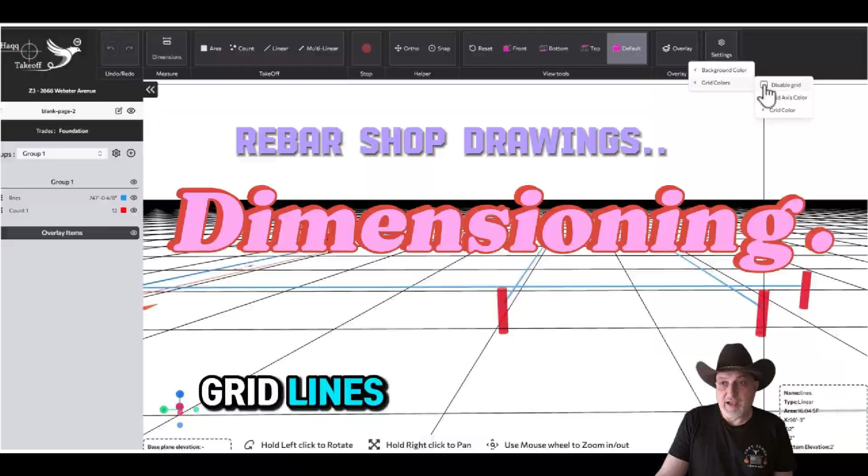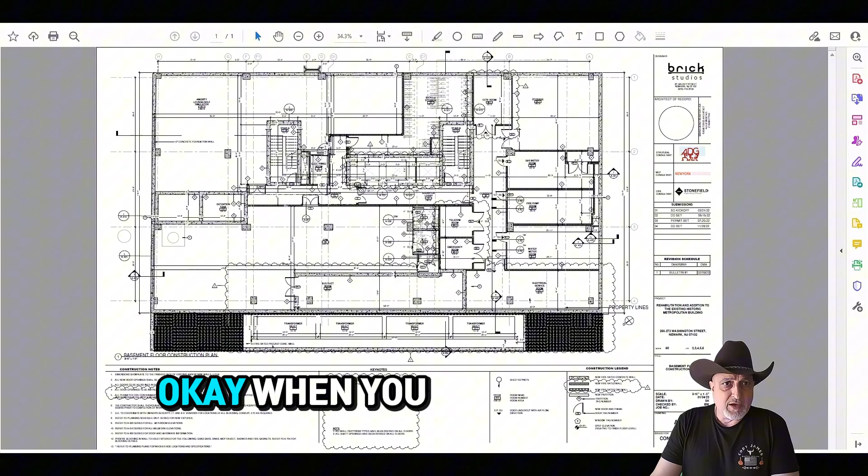In this video, I'm going to show you how proper dimensioning in rebar shop drawings has to be done. Right now, what you see is pretty much a rectangle building, but we don't see any dimensions for it. When you look at the architectural plans, they give you dimensions between the column lines, and we need to show these dimensions in our shop drawings. Plus, we need more. These are not enough.

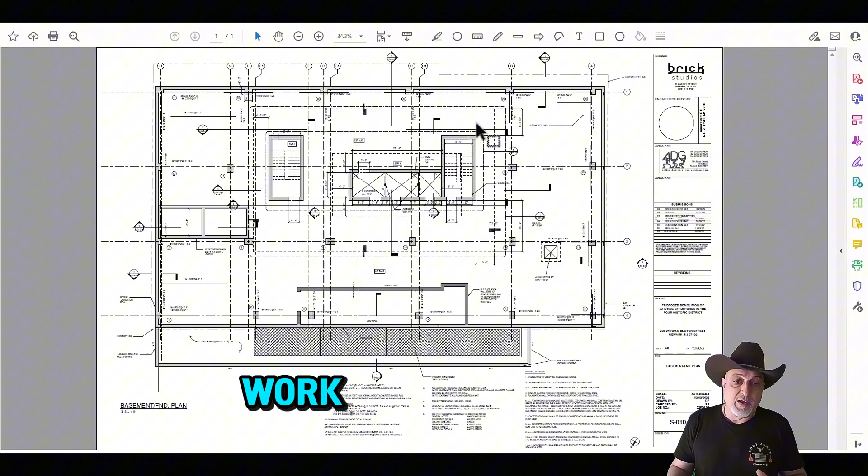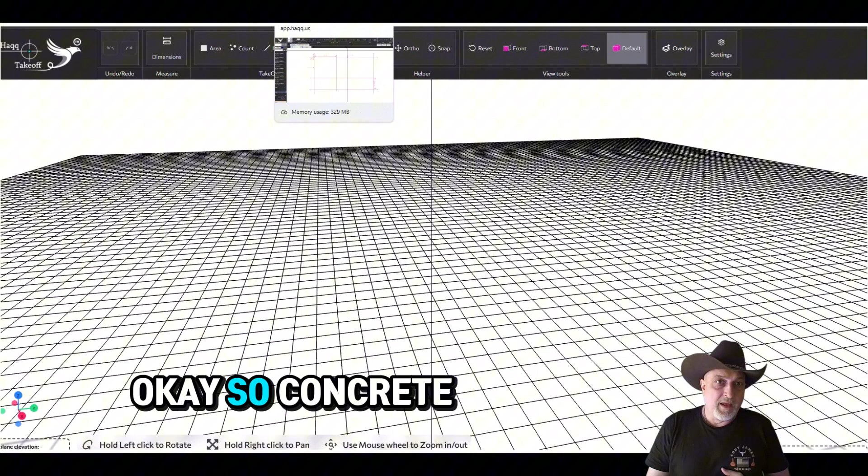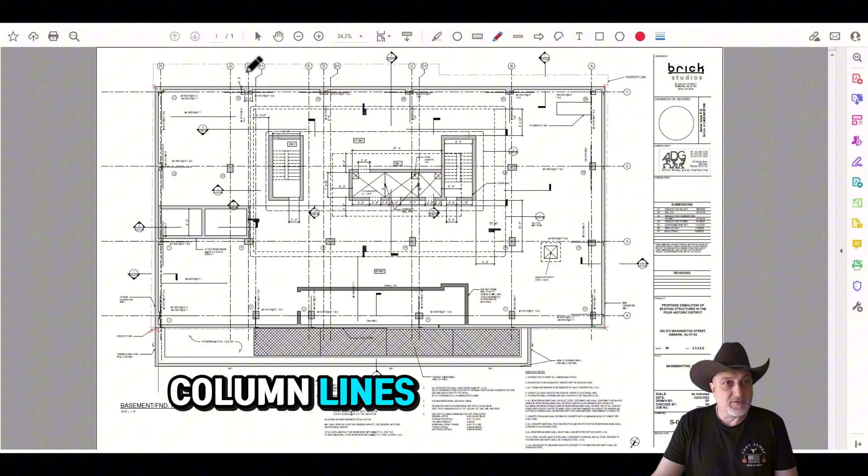Why? First, you need to understand how surveying works. When the concrete contractor goes to the site, there's pretty much nothing out there. This is what your site looks like: just some dirt. So the concrete guy goes to the GC and tells him, I need the corner points of the building. Give me the 4 corners of the building, this corner, this corner, this corner, and this corner, and some dimensions from these corner lines offset to the column lines. For example, column F and column line 3.

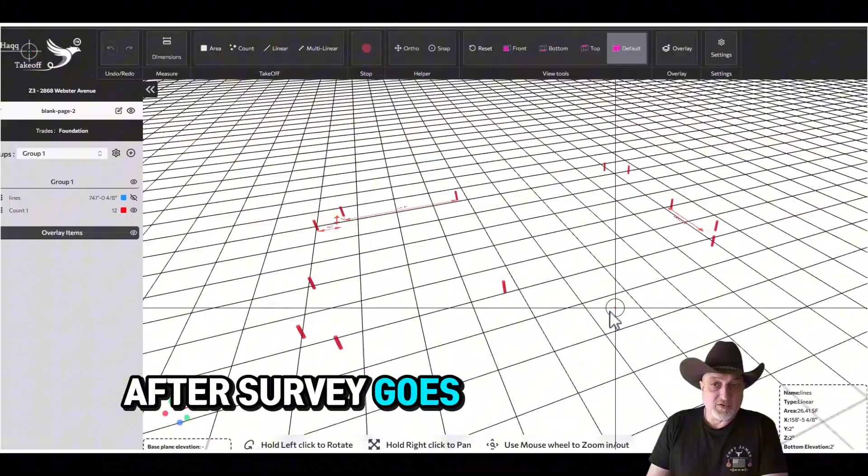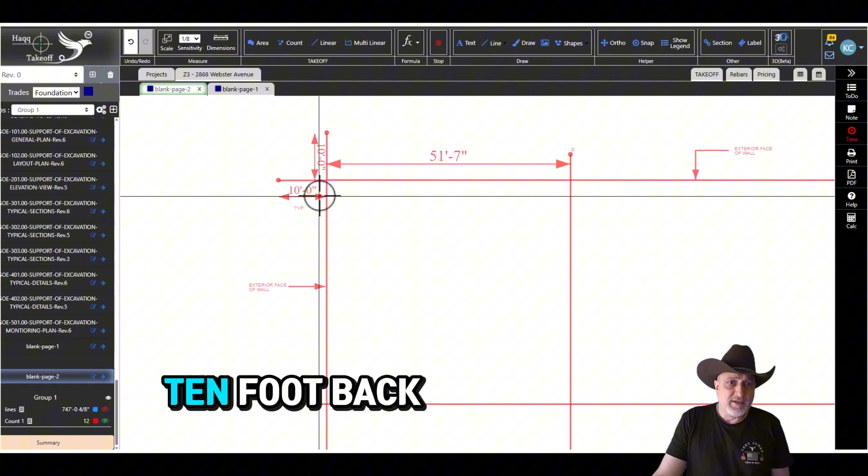The surveyor goes to the site and gives you these offset points. After the surveyor goes to the site, he puts some stakes on the ground and provides this drawing. He tells you, I put these stakes on the ground, and this stake is 10 foot back from the exterior face of the concrete wall, the same way in this direction, and the same way across the line. For all 4 corners he provides stakes. So these line up, and we get a straight line.

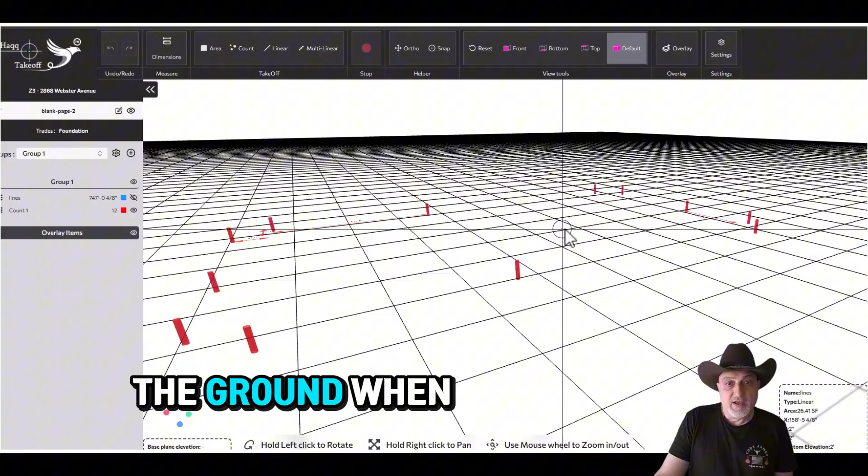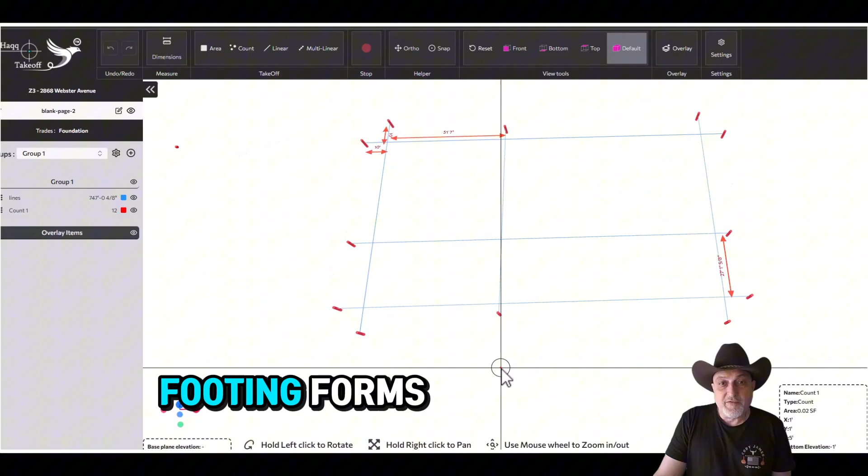When the concrete guy goes to the site, he sees these stakes on the ground, and he puts up some string lines, like ropes. Let me get rid of this grid system. So he puts some ropes on the ground to set his footing forms. But when he's putting his footing forms, he still works from the surveyor's exterior face of the walls. He doesn't have the exterior face of the footings. He has to work from the walls. So wall dimensions are critical.

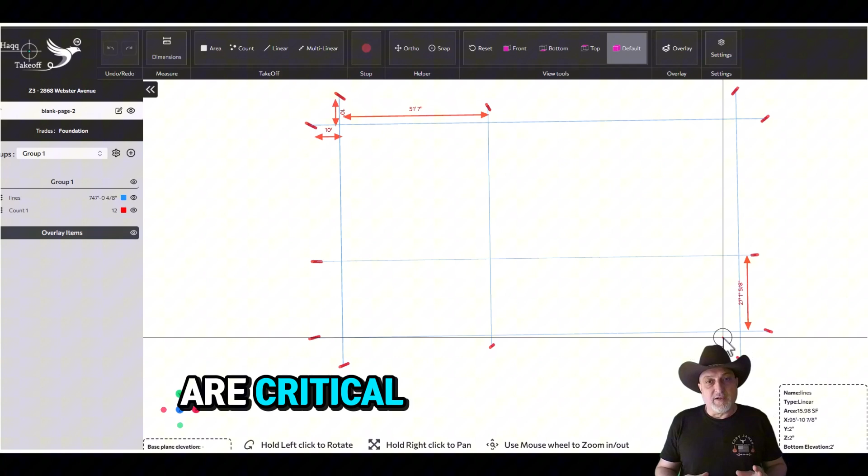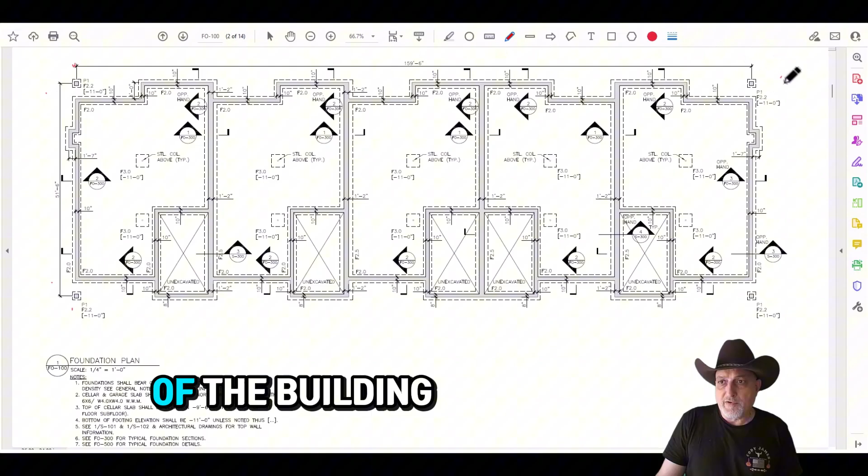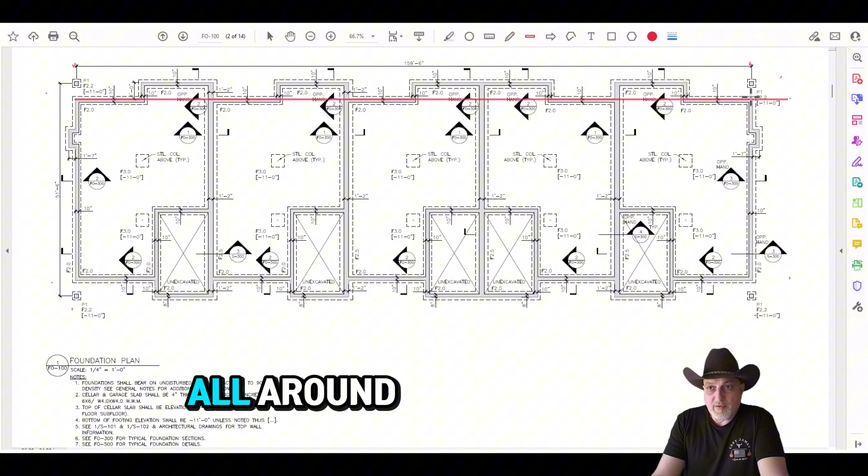Now let's go to this drawing, for example. This one has a lot of ins and outs. Let's say the surveyor gives him a couple of points at the corners of the building, 10 foot off this corner this way and 10 foot this way, same thing for 4 corners of the building. Then the concrete guy lines up with the face of the wall. He puts a string line from one to another all around, and he uses those stakes the surveyor provided.

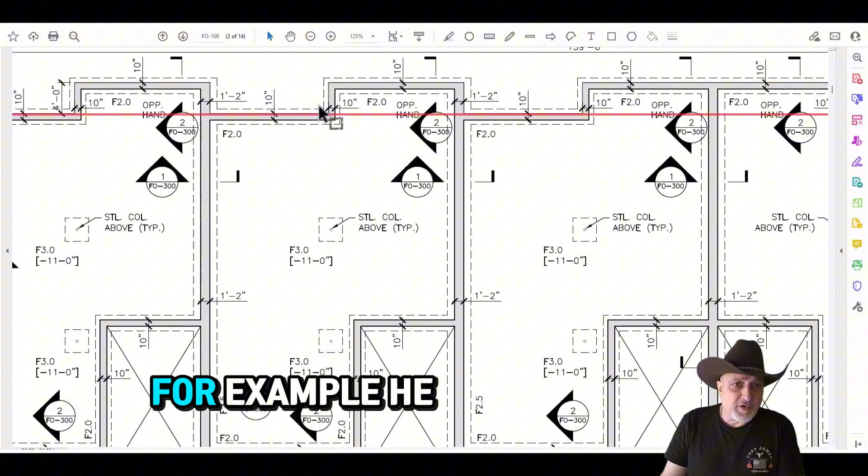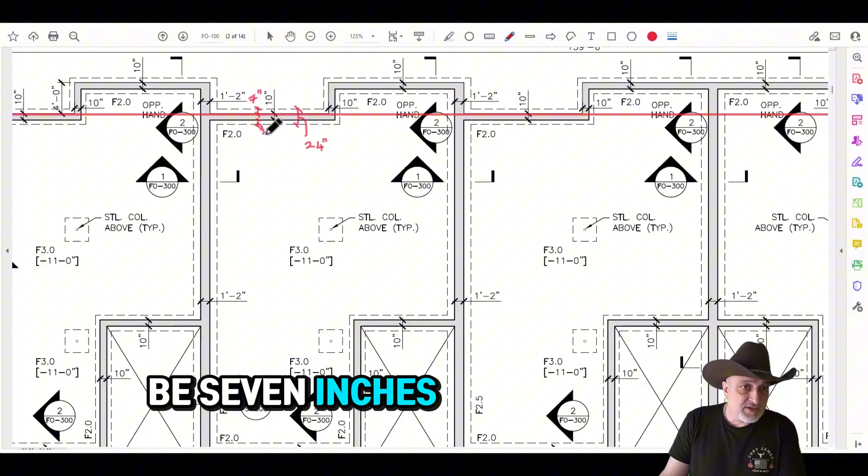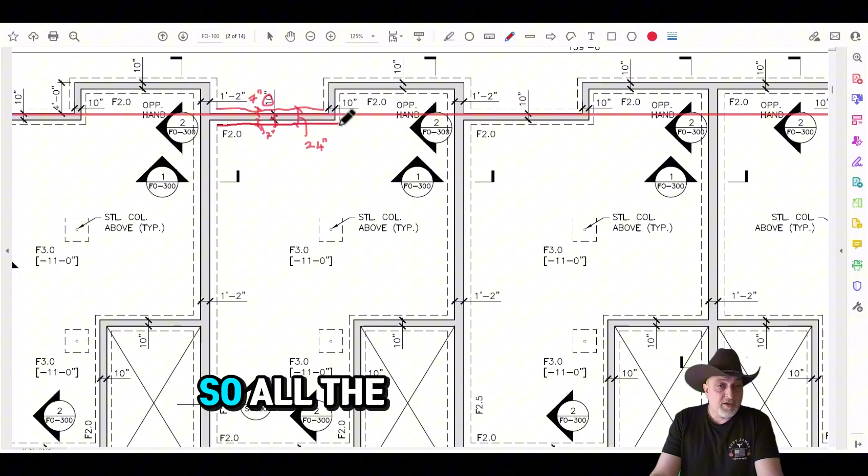When he puts up his string lines, he pulls off dimensions from this string line to set his formwork for the footings. For example, if this is a 2 foot footing, 24 inches, he goes 7 inches on this side. So he pulls off 7 inches from the exterior face of the wall to set his form for the footing. And he takes 17 inches, because the wall is 10 inches, 10 plus 7, 17 inches here to set this form. So all the dimensions work from the exterior face of the wall.

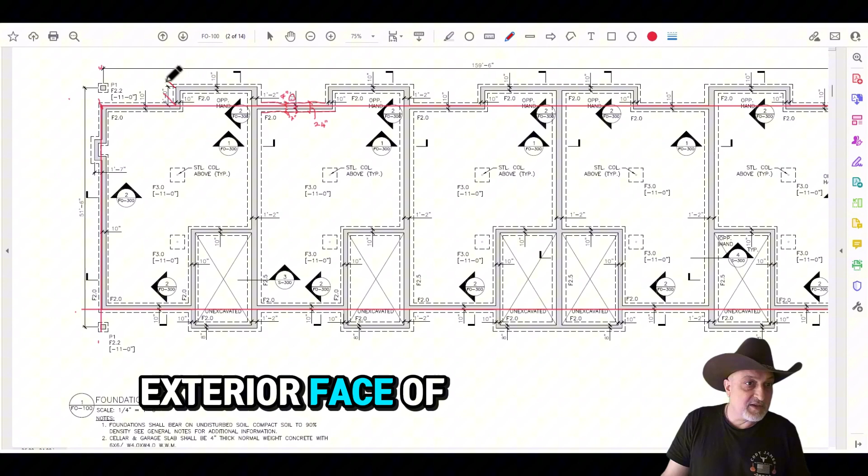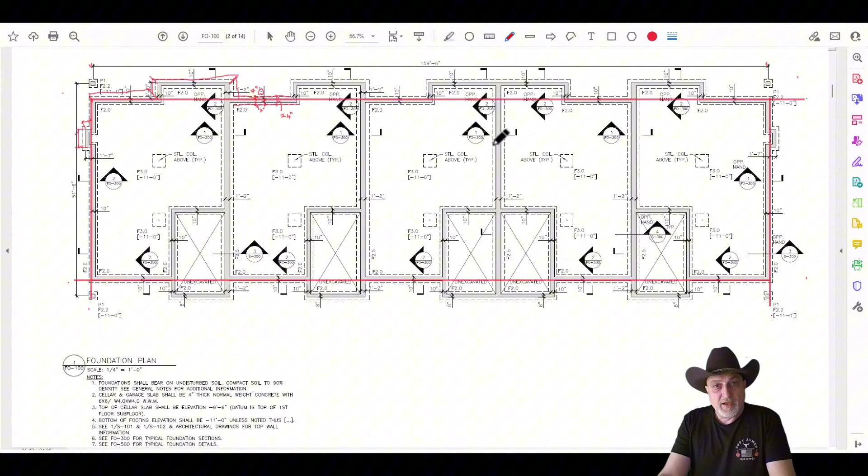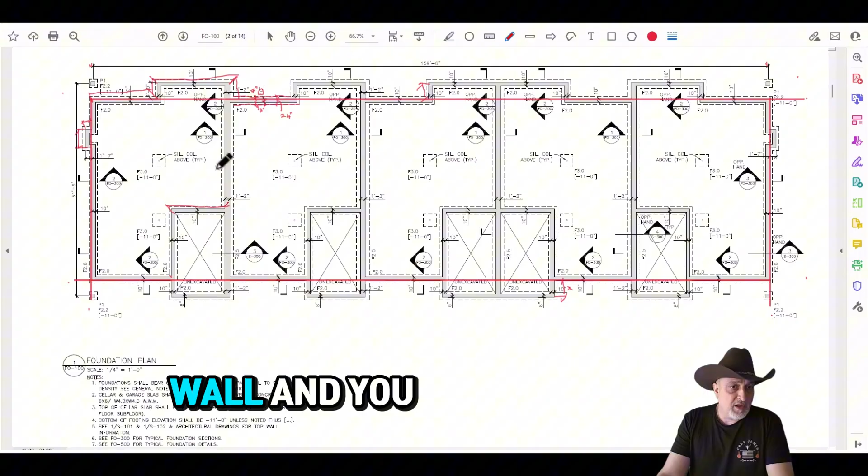Now you know this. So what dimensions do we have to give them? We have to give them corner to corner dimensions, exterior face of the walls, corner to corner. We have to provide these dimensions all around the building. If these dimensions are the same, you can just provide one. That will be enough for all of them. If it's a different dimension, then you have to provide all of them. For interior walls, you have to provide dimensions wall to wall. And you have to provide wall thicknesses.

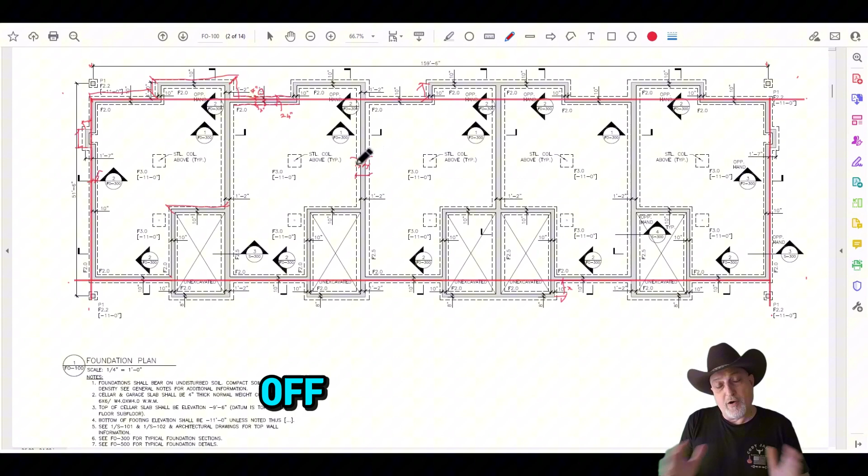And then the width of the footings, and what's the offset for the footing edges. Sometimes the footing will be off. This is critical because on the footings especially, setting dowels is very critical. If they set the dowels in the wrong place, they have to chop them out and drill them back in, and they may have to remove the footing too. Then it will be very costly.

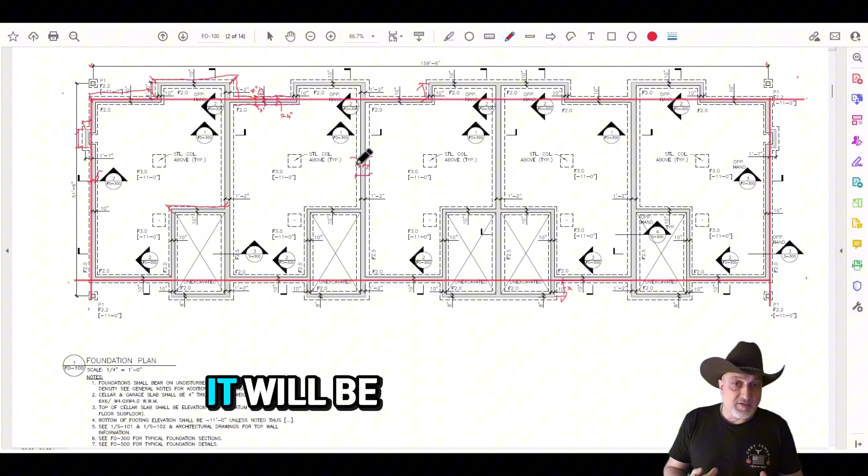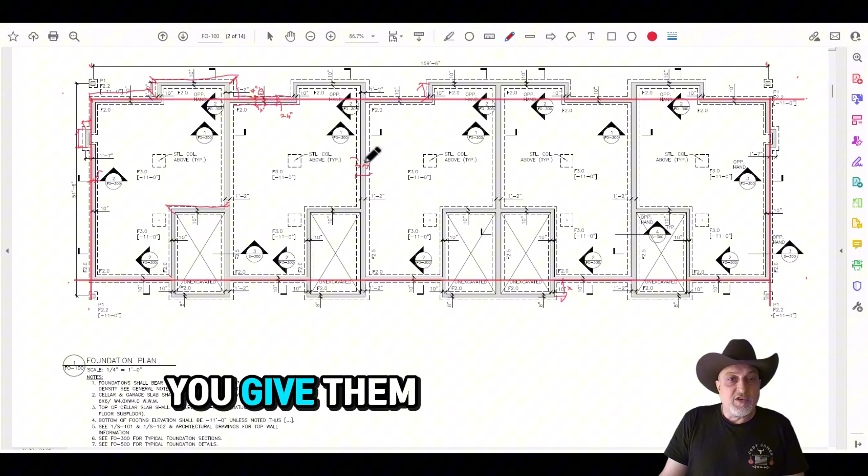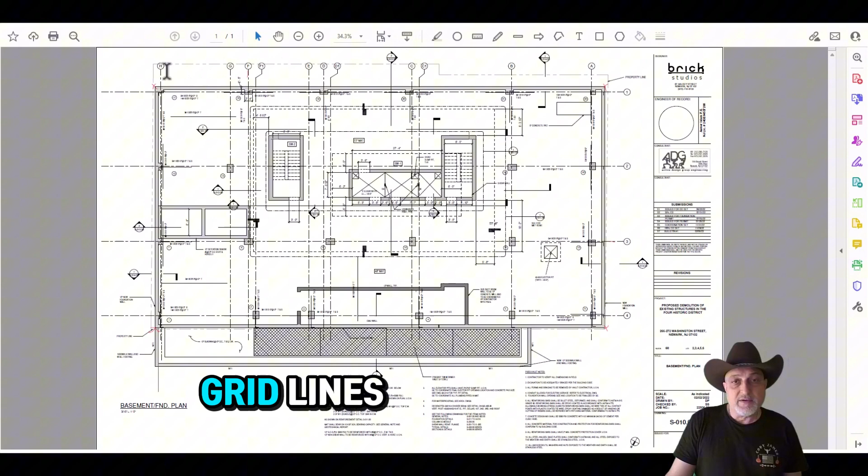So even in the footing shop drawings for the wall footings, you need to provide dimensions for the walls. Don't give dimensions for the footings. That's worthless. You always give dimensions for the walls, and they take it from there. When you give them these offset dimensions, that's all they need. They can figure out the rest. So we have to provide exterior wall corner to corner dimensions. We also have to provide dimensions for the column lines, grid lines, dimensions between column lines. All of these dimensions you have to provide.

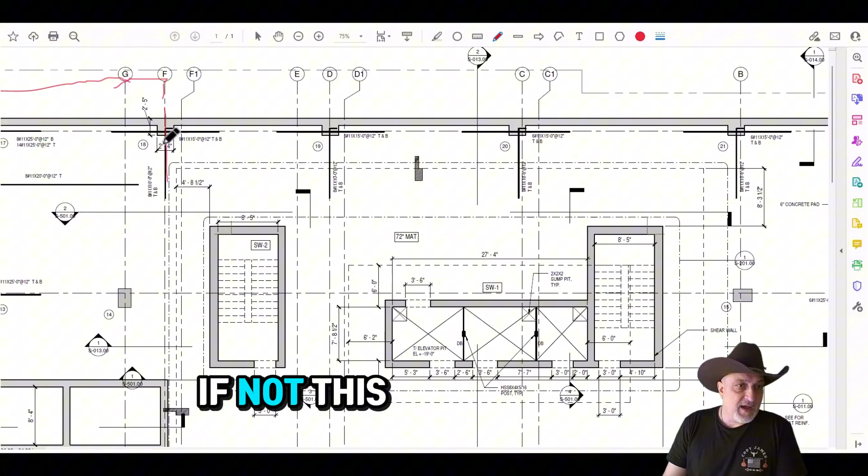Not only that, most of the time columns are at the center of the grid lines, like this one, but sometimes not. If they are, this is good enough.

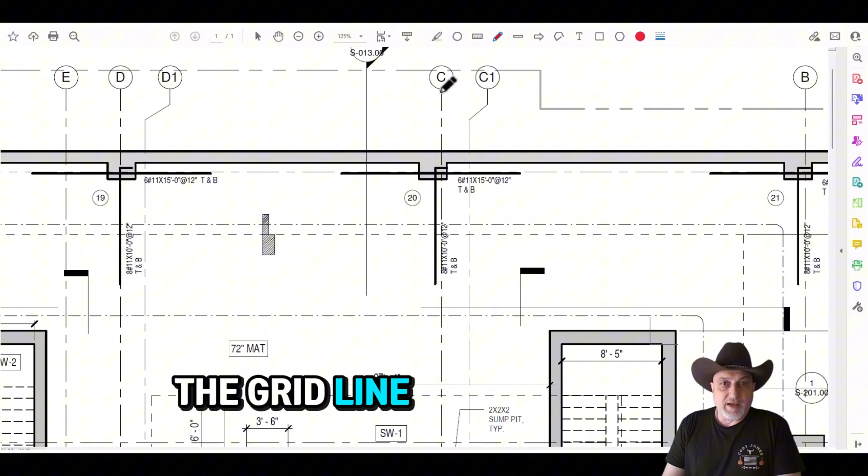Okay, this is perfect. Or you can just give him this dimension, that will be okay too. You can give him this dimension, we'll take this as well. But sometimes columns are offset. Let's say this column, for example, is not at the center of the grid line. So what you'll do is give him the dimension from either side, either this side or that side. You give him one dimension and another dimension from here or here.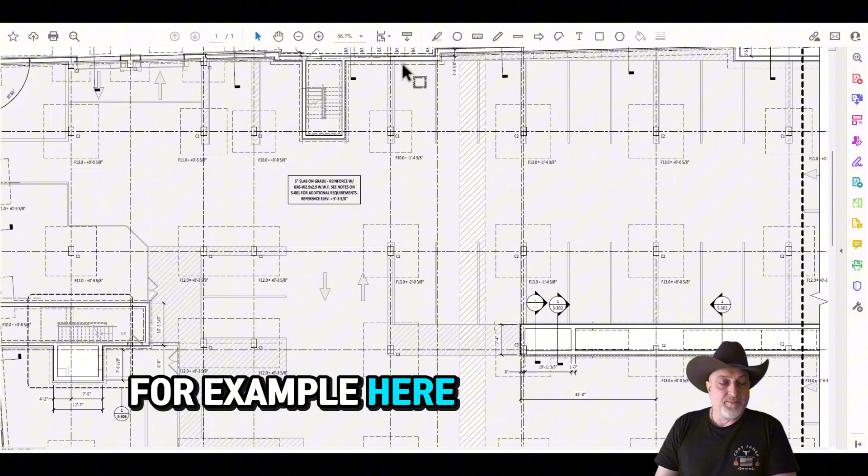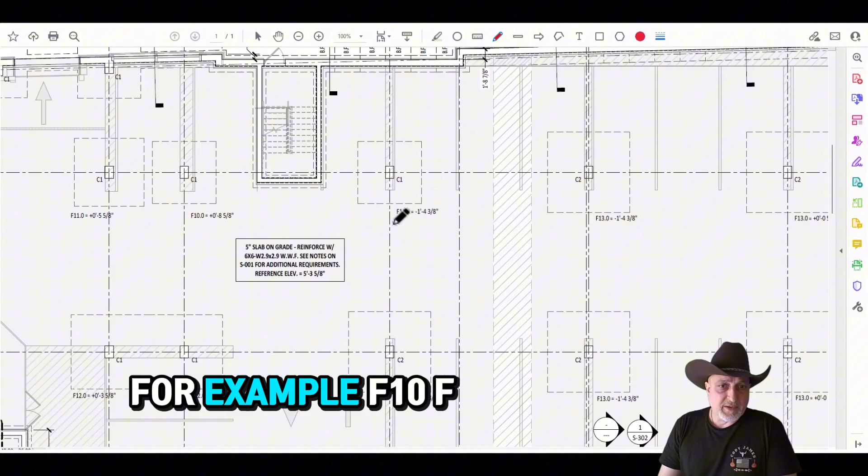Okay, and let's take a look at the column footings, for example, here. On this drawing, I believe everything is at the center of the column lines. If you just provide these column line to column line grid dimensions, that will be enough to locate these column footings and columns. And give some dimensions, for example, for the F10 footing. Okay, we can guess this is a 10 by 10 footing, but just give one dimension for each type of footing. It doesn't really hurt much.

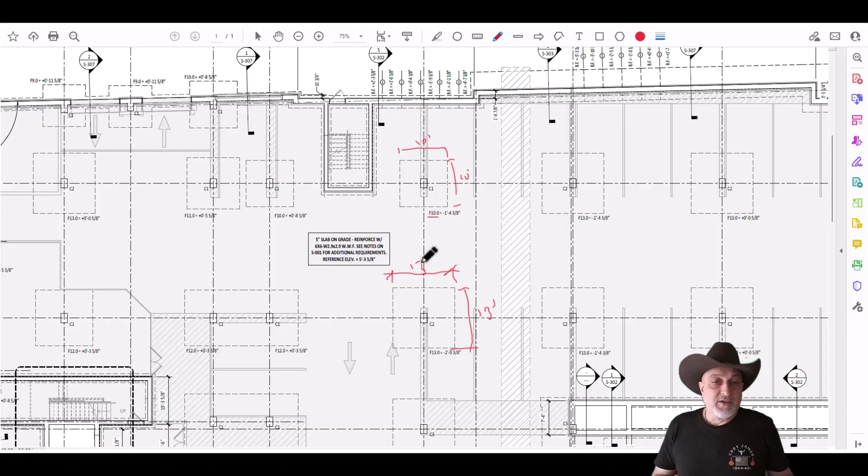And you've got F13, so many F13s here, just give one dimension for one of them. F13, 13 feet here, 13 feet here. So the guy in the field knows to make sure F13 is 13 feet long. Sometimes the engineer may use something else. For F13, he can use some other dimension. He doesn't have to use 13 feet.

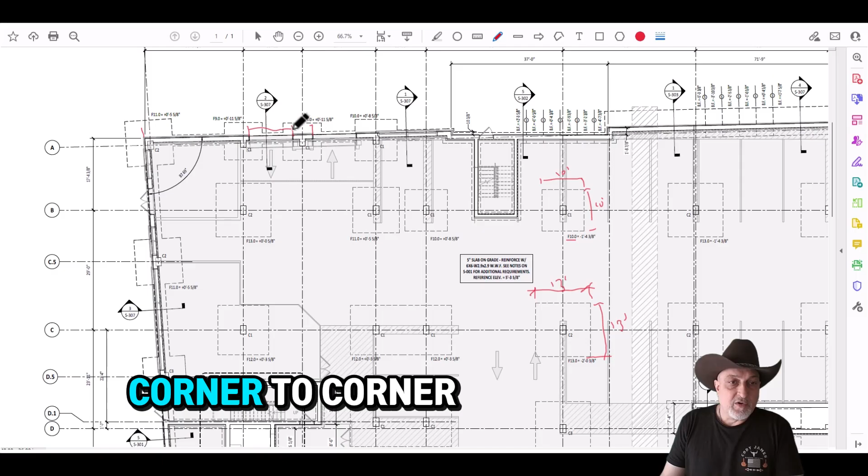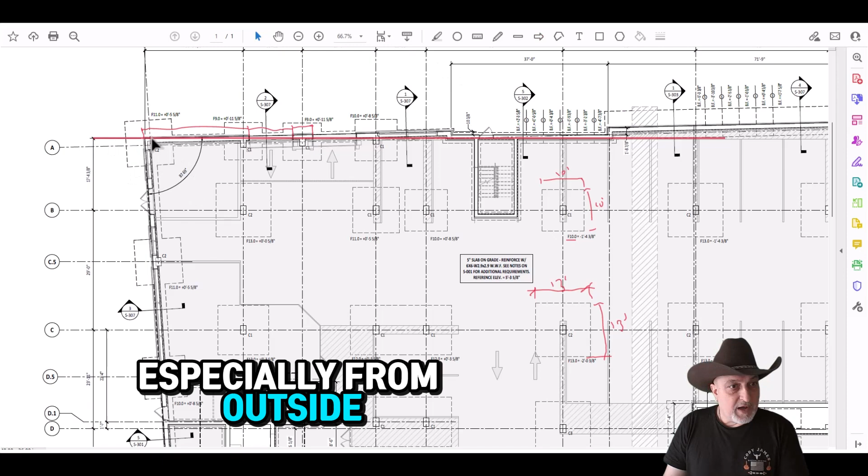And for the walls, we said exterior corner to corner dimensions. For the openings, yes, you have to provide dimensions corner to corner. These are very useful at the site. If there's an angle, give them the angle from here. That's the straight line. Let's get a straight line here. Give them the angle from the straight line, especially from the outside of the corner. What is it? 3 degrees, 2 degrees, whatever it is. This angle is not going to be useful for them.

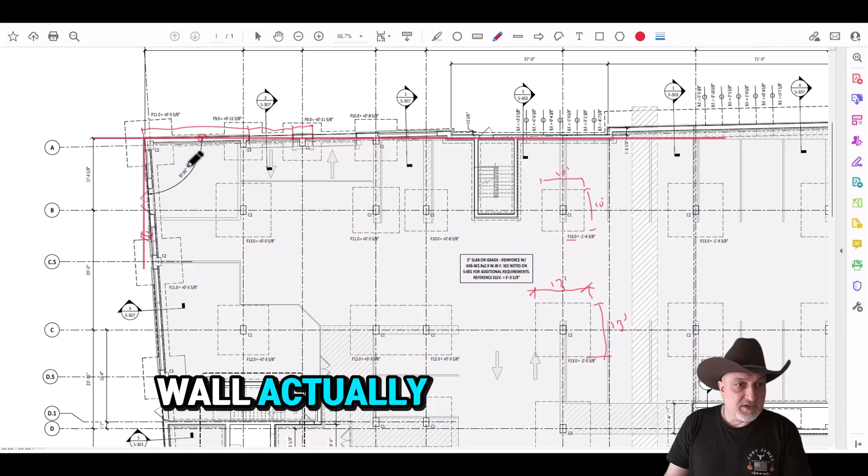And you can give another angle here. This angle maybe. After setting this wall, actually this may work. You can pull from the other wall. But before setting this wall, there's no other wall, so this is not going to work.

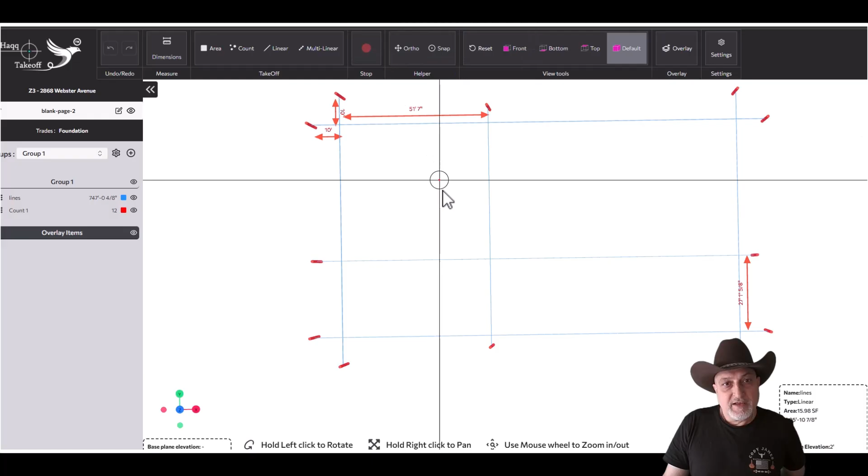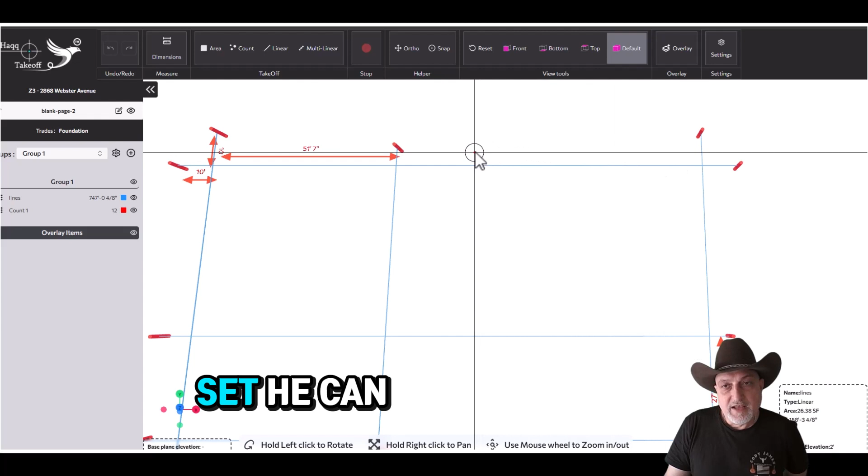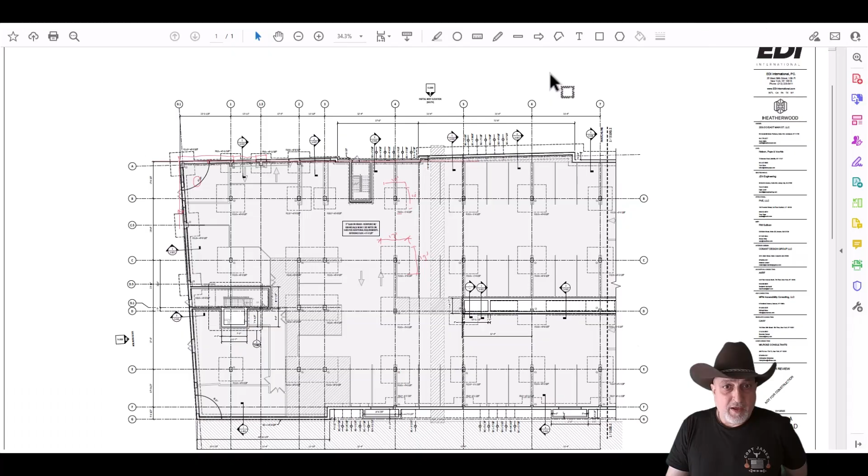And then from the same string line, he goes off like an inch and a half back to set his doubles. Okay, so it is very important to understand what dimensions need to be given. Okay, first, we give dimensions for the grid lines. On each grid line, we've got to provide dimensions. Second, all exterior walls, corner to corner, exterior face of the wall. And we've got to give the thickness so they can figure out the interior face of the wall.

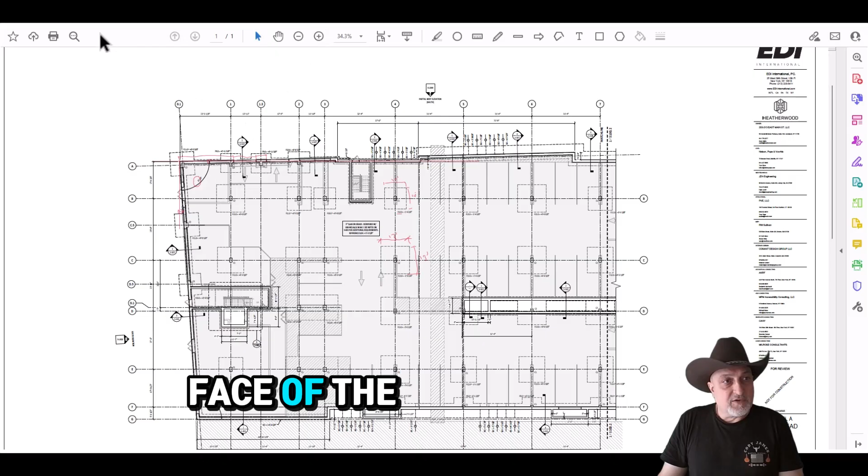When you give him the thickness of the wall, he can basically get the dimension. He's just going to set his form 10 foot off from his first formwork. So it's going to be easy for him. They just snap a line on top of the footing and they're good to go. Okay, this is basically it.

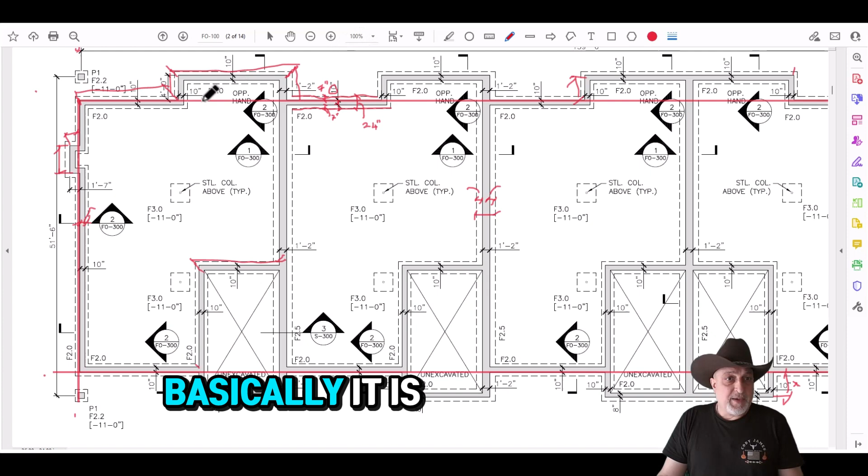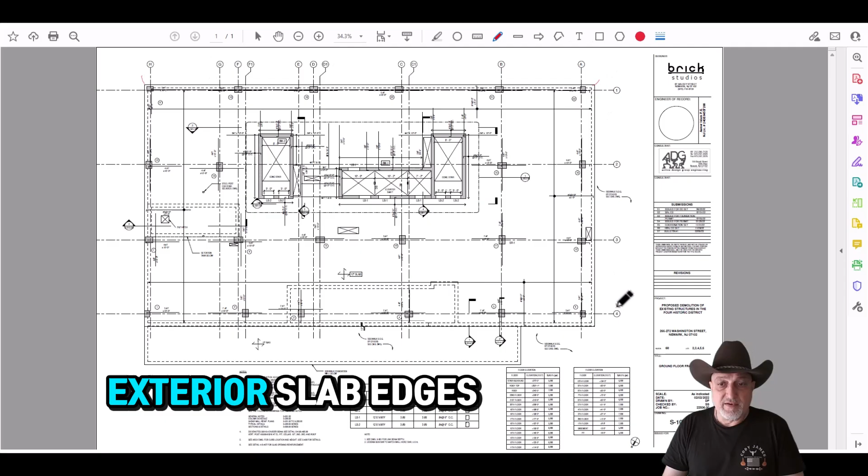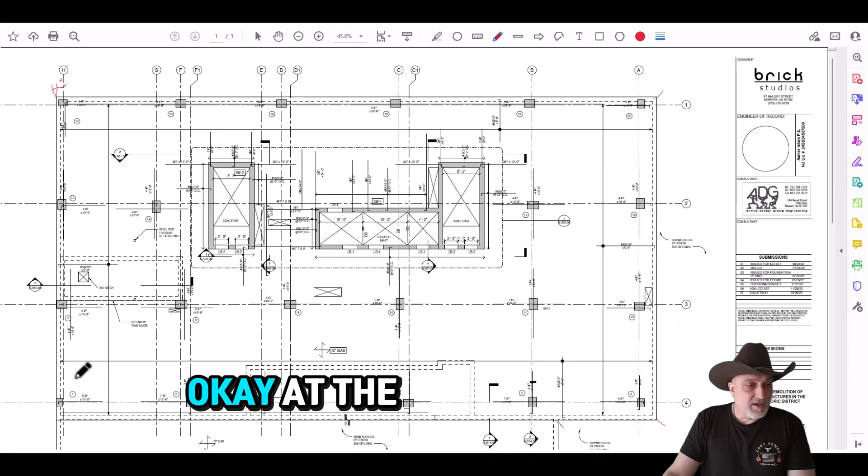And one more thing I want to talk about, for example, openings on the slabs and these shear walls. Let's say they're doing this wall. First of all, you've got to give them dimensions from the exterior slab edges. Corner to corner, corner to corner, all the exterior dimensions you need to provide. And then columns, column locations. And I will give them how much distance from this column line. Okay, at each corner. Give them the location, how they're going to locate them. Make it easy for them.

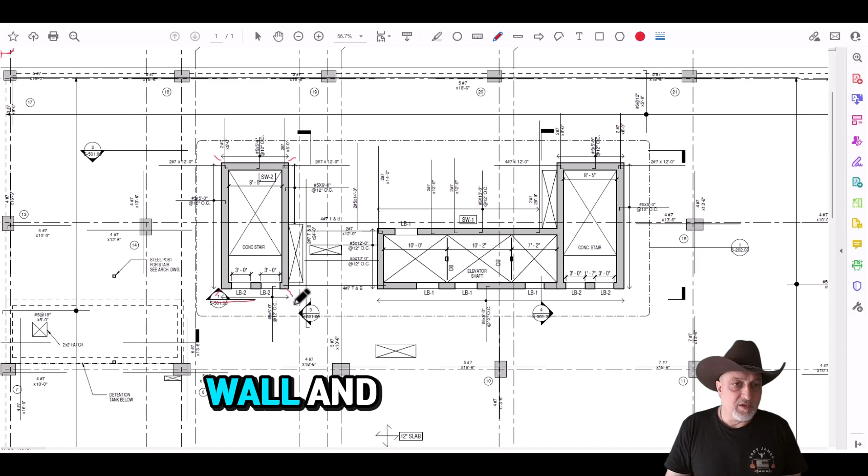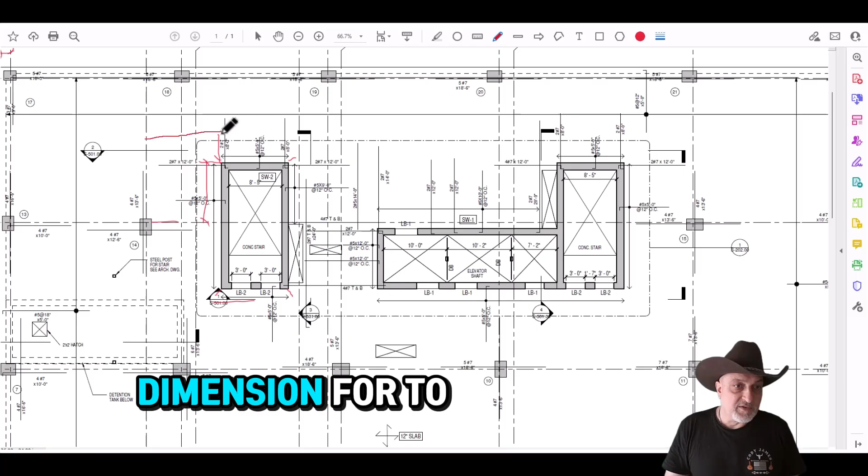And imagine how they're going to locate this shear wall. Okay, we gave them the dimensions for all the exterior of the shear wall, but where does it go, how far away from any column line? So we have this column line, for example, we can provide just this dimension so they can locate it in the north-south direction, and I need to provide them another dimension to locate it east-west. So they can easily locate this corner and take it from there.

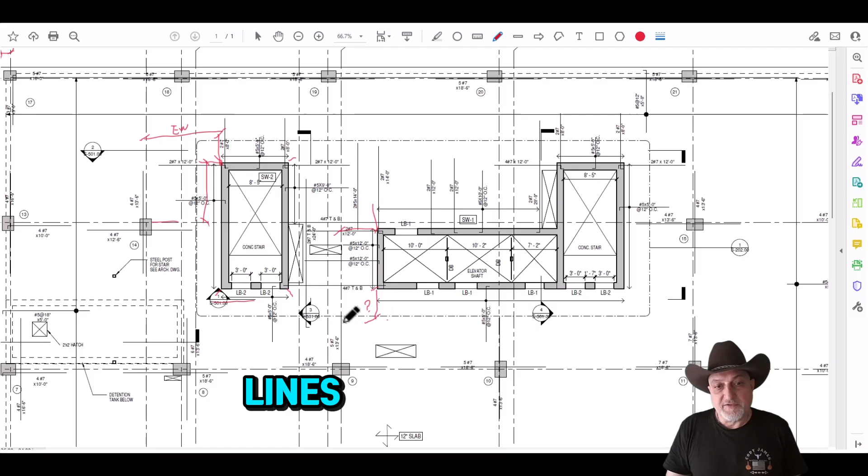Same thing on this one. Just give me the dimension east-west and north-south for the same corner or a different corner from the column lines. Known grid lines are your known lines. But this wall, we don't know how far away it is from the grid line unless you provide a dimension. So grid lines are known. You just put a little dimension here, how far away from the grid line. Same thing here. Same thing on the openings.

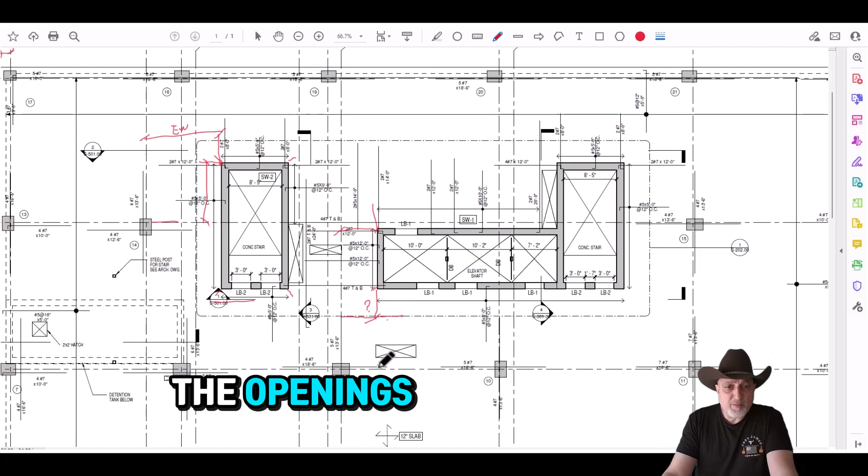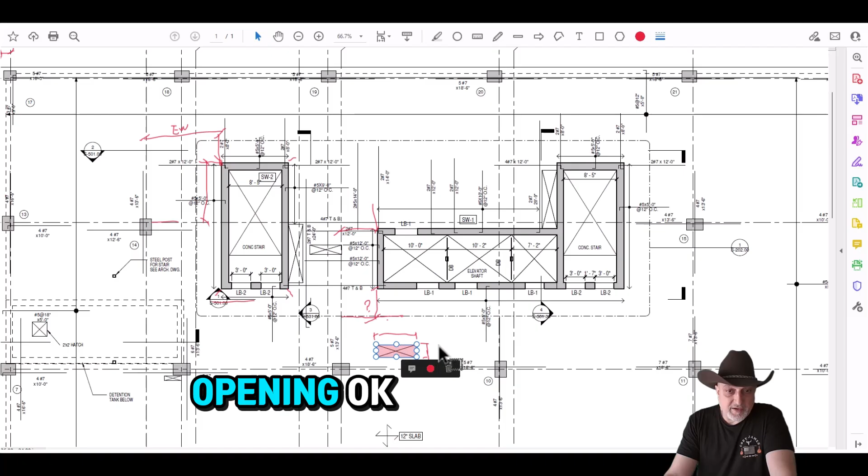You provide dimensions for the opening. These are the size of his formwork, but where is he going to put his formwork? Okay, I hope you understand. You give the dimensions for this opening. Okay, where am I going to put this opening? Okay, it looks like here, but where? A little bit over here, a little bit down. Where is this location on the field?

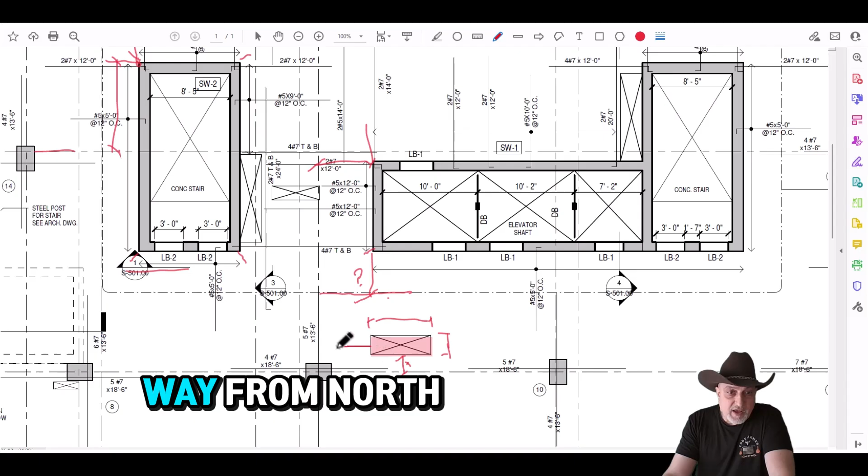It is very important. You need to provide dimensions from a known grid line. Here, this dimension each way, north-south and east-west. And now they can locate where this goes.